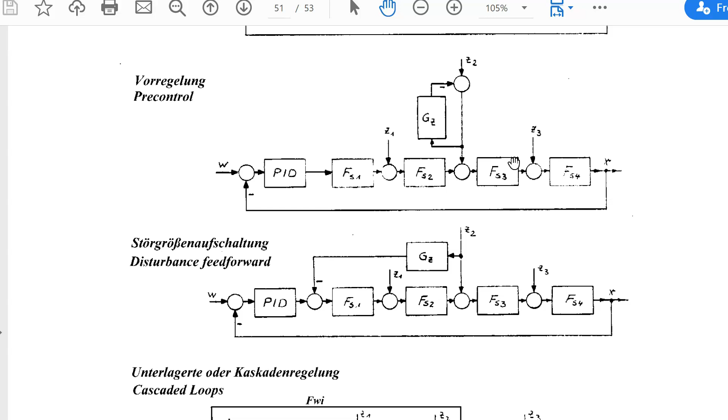This is the actuator of your normal closed loop system. Add the signal to the output of the controller, and this is called disturbance feed-forward. But the additional hardware necessity is a disturbance sensor, and sometimes the disturbance cannot be measured, or it is expensive to measure. Now I show you a method where you don't need an additional hardware sensor. You can do this with intelligent software.

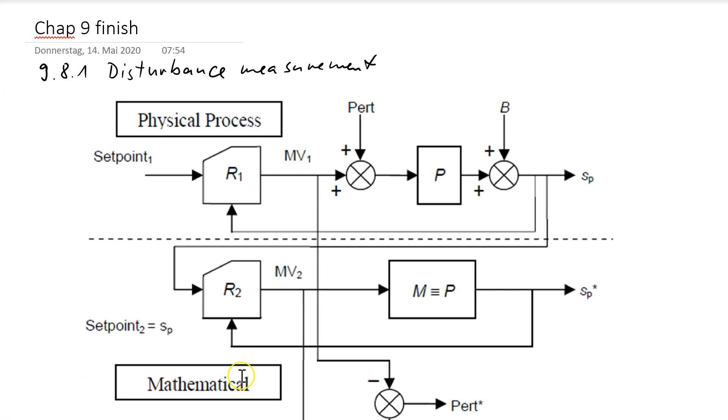Okay, how can we do this? There is a picture in the lecture I have copied out of the book of Mr. Richalet. The idea he presented there was charming. Let's look for this picture. Picture is gone. I have to look for it here. Control C, Control V. This is the signal block diagram of a measurement of the disturbance.

Here you see the perturbation, as he called it, another word for disturbance. I'm not sure whether disturbance or perturbation is the better expression. So there is an external unknown influence on your system. This is the original process. Maybe there is another disturbance at the end of the process, but this can be shifted to the input. We measure this signal independently of whether the disturbance has an influence at the end, in the middle, or at the beginning of the process. We only want this signal without a hardware sensor.

Then note, this is the normal controller software, PFC or DB or PI or any controller. This is the set point, the desired value, the measured value, and MV is the name Mr. Richalet, the Frenchman, used: manipulated variable. MV is the output of the controller, in our writing the y value, y of k. Manipulated variable just means controller output.

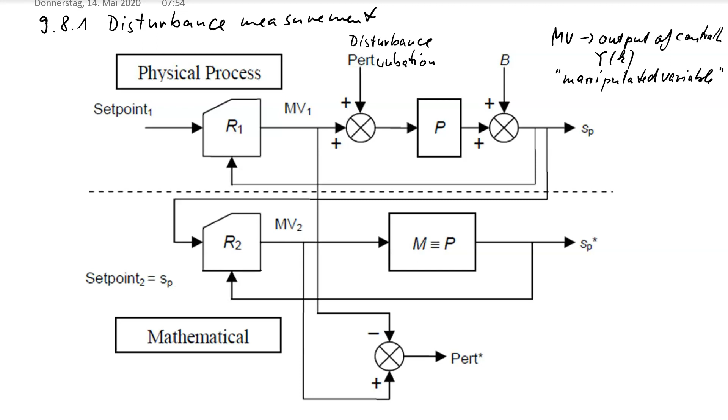So I think this should be clear, and I want to show you this in my simulator, where I use this trick to show you the measurement of the disturbance in some examples. So I open my simulator, WinDF C#. This is a freshly started simulator. And first I show you the system with our well-known 2PT1 system. I load the FZ file of our 2PT1 system, which we have used as a simulation in previous steps.

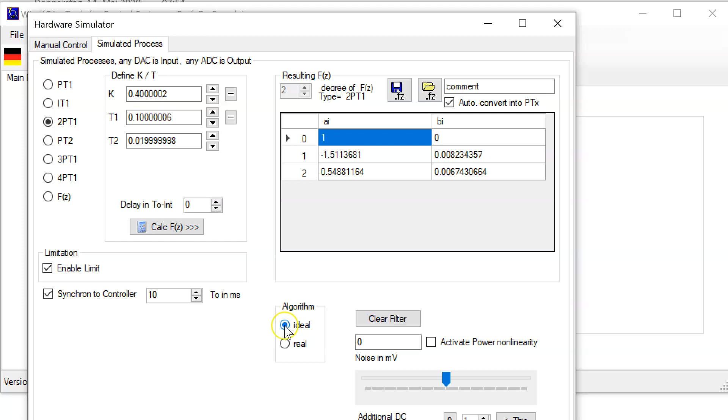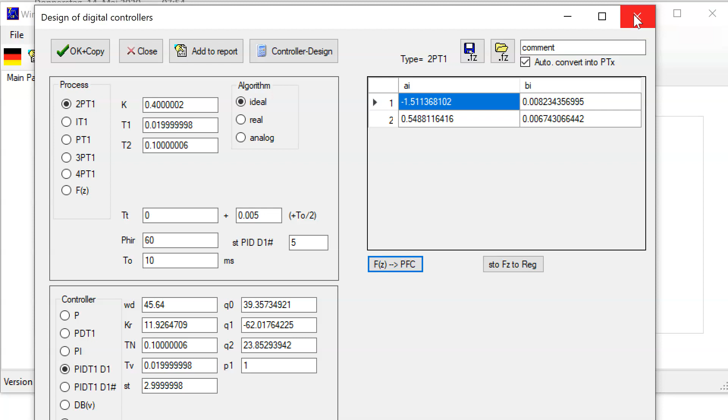So K is 0.4, T1 is 100 milliseconds, T2 is 20 milliseconds. We want to sample with 10 milliseconds. Let's start with the ideal algorithm. We make a controller design to have good running controllers, ideal version; PFC loads the same process. I make a controller design in ideal version, send all controllers to my box, and click on this point. This is a good point to send the A's and B's to my PFC box. Sometimes this can also help to have less typing. So I close this and open my advanced adaptive box.

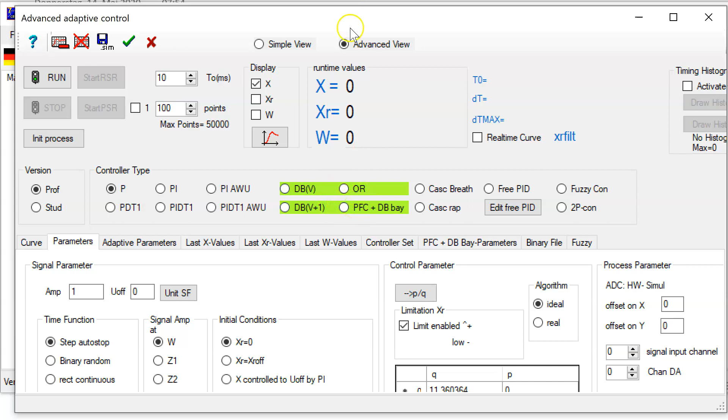So I have here 10 milliseconds, that is okay. Ideal algorithm is switched. Unit step function, is that what we want to see here? And to see also PFCs, we can open this radio button with advanced view. So I can now shift this up because we want to see curves here in this region.

I'll just show you how to display this disturbance measurement in our PFC parameter box.

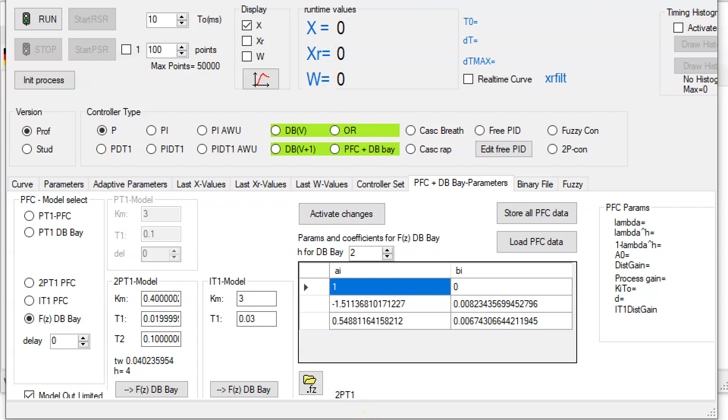There is a button. This window is rather large, so I have to open it. A button where I can use my measurement. The normal signals I can measure are X, the controlled output, the most interesting signal. Then W is the desired value. Sometimes this is interesting, how large the desired value is, and this is the controller output. If you click this, you see in the second curve the controller output.

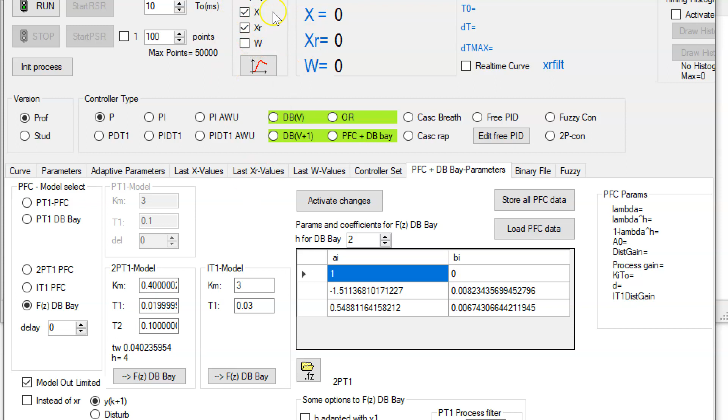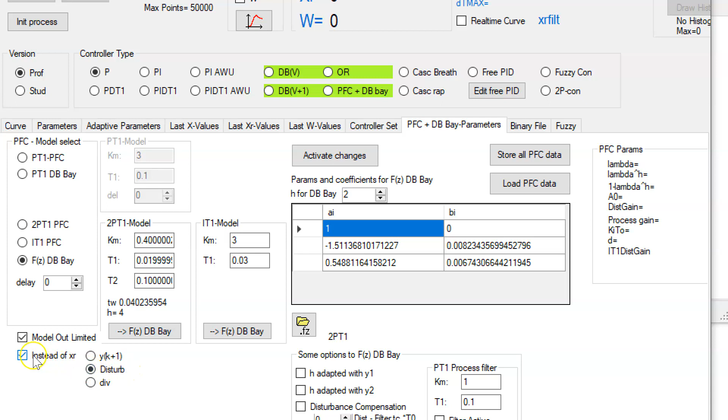I don't want to have more buttons here. So what I have done is I can now change the signal for the controller output to either the second prediction of my deadbeat, or here you see this is the disturbance I measure with this principle. So if I click this checkbox and this checkbox with this radio button, then the signal which is presented here with the name XR contains the measured disturbance.

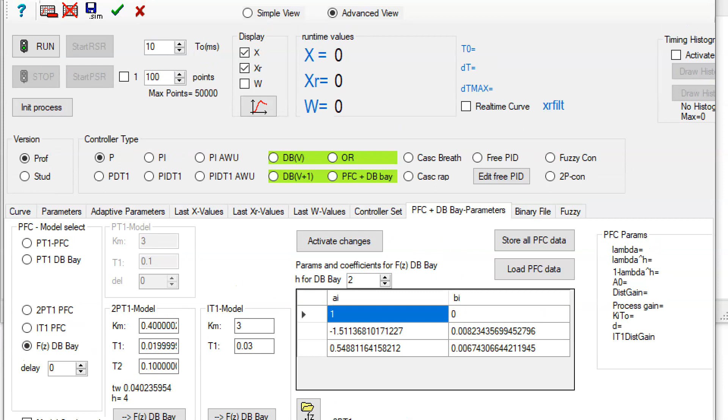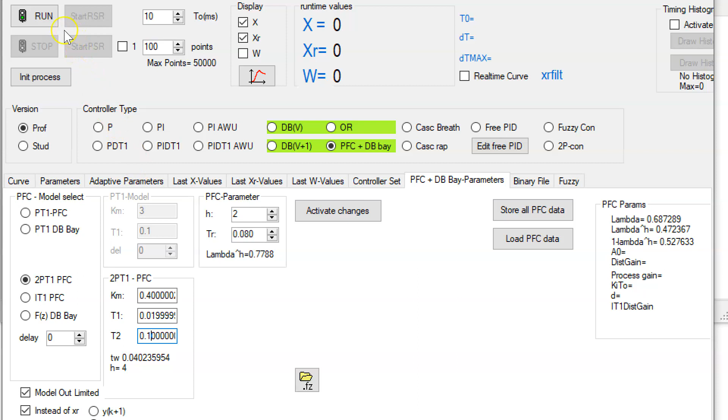Okay, let's play now with a controller. Say I play with the PFC, the PFC of Mr. Richalet. Here the process parameters are still copied. I just take H is 2 and 80 milliseconds, the default values, why not? And now I run the loop and you will see no disturbance, because there is no disturbance.

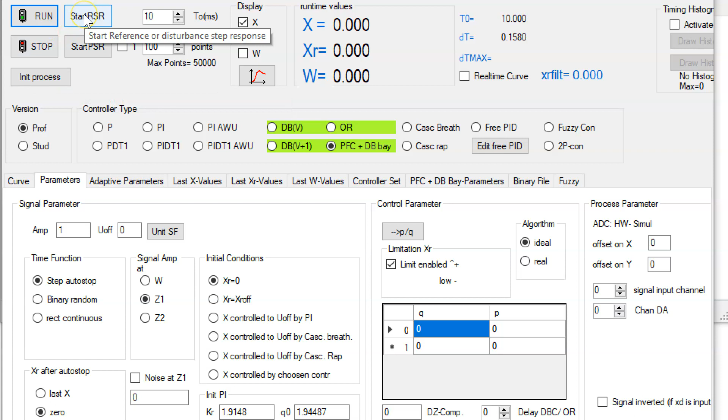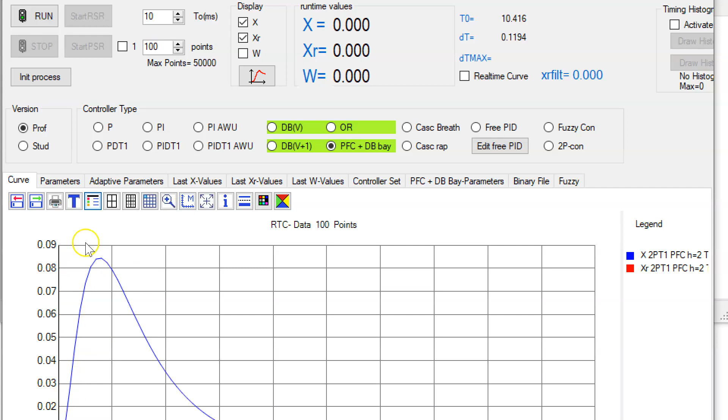I of course should now switch to a disturbance response, because then I know the disturbance is a step function. And now look what happens if I go into this and measure the disturbance step response. I see one signal, that is the disturbance step response of my controller, but I see no disturbance here. Okay, there is something wrong.

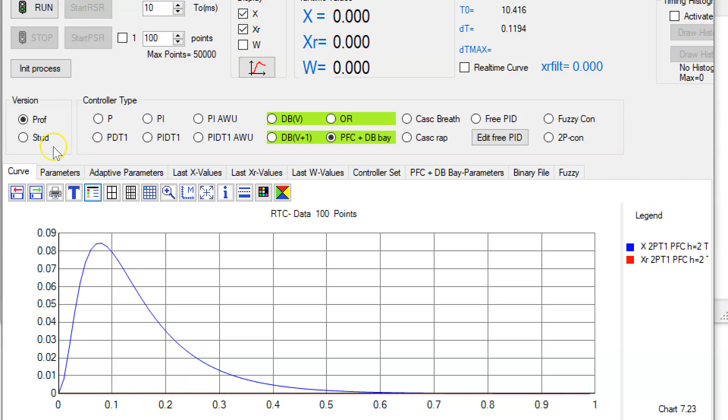Schade eigentlich. Okay, I have to check. Yeah, I'm very unhappy because we have seen now an error in my software.

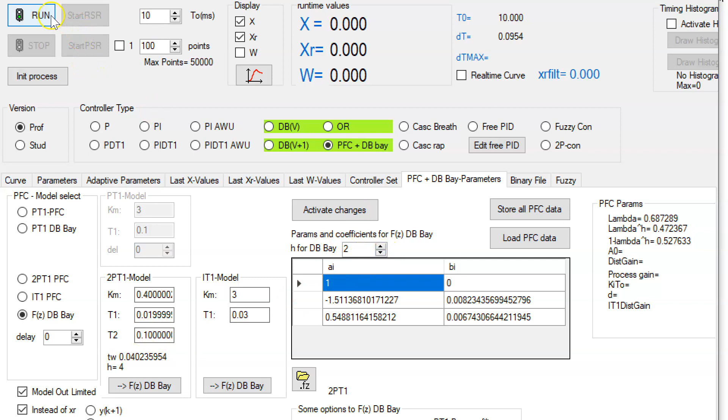Okay, if I measure the disturbance first with my deadbeat, independent of all these parameters, then you will see two curves, and one curve is here, the small disturbance response. It's very small, but here the red curve is now the measurement of the disturbance, of the perturbation, with this principle. And you see, after some steps, we have 10 milliseconds.

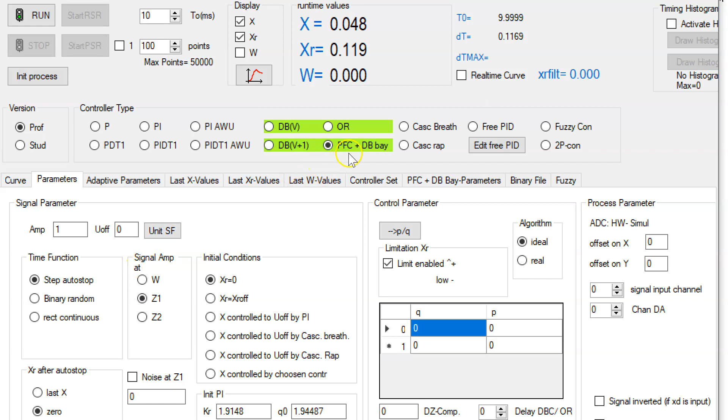So here, this is the situation after 6 to 7 steps. We have a constant, clear signal with the amplitude 1, because we have amplitude 1 at my disturbance input. So after a transition, we see a disturbance signal which is exactly 1. If I have the PFC, if I don't click on this, then this works. The first time I click on this, the disturbance measurement doesn't work. I have to look into the code. There must be a small, simple error, but with this version you can avoid this.

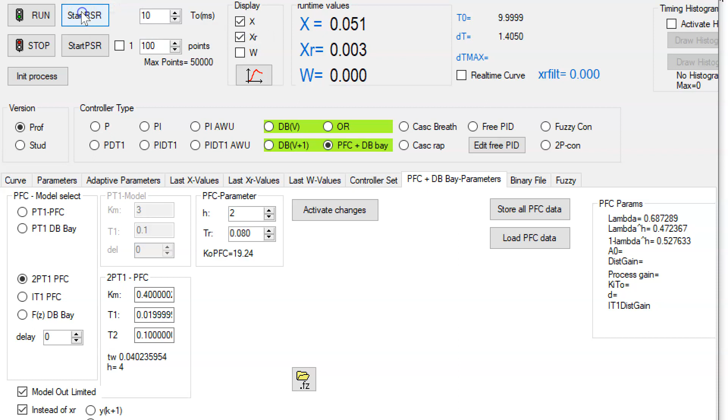First start with my controller and then go to this point, and then you see the disturbance response measured with the PFC controller. I delete all curves, start measurement, and you see here the disturbance response of the real PFC controller, and here the red signal is really the measured disturbance, and you see after one step the disturbance signal is exactly 1. So if you have the same controller in the second loop and in the first loop, the disturbance behavior, not the disturbance signal, looks very good.

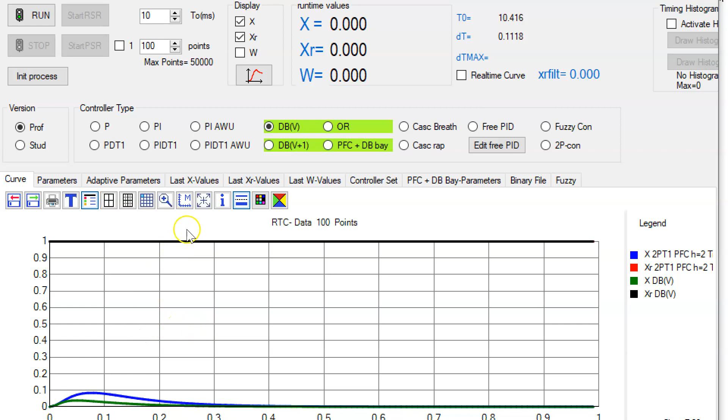This works also if you use other controllers. DB(V) controller, let's check. If I do this, you see it's the same. Let's check if I see a similar situation. Yeah, the black curve here you can see, because if I make the curve a little bit thicker, then you can see the black curve is just exactly this value. So this is proof that the

disturbance measurement is really working, and I get here a software signal for my input disturbance, and this will be used then in the next chapter, I think 9.13, to improve my deadbeat version to come to a better disturbance behavior. Okay, so far this disturbance measurement. So in the next video I then add the PFC for IT1 processes.